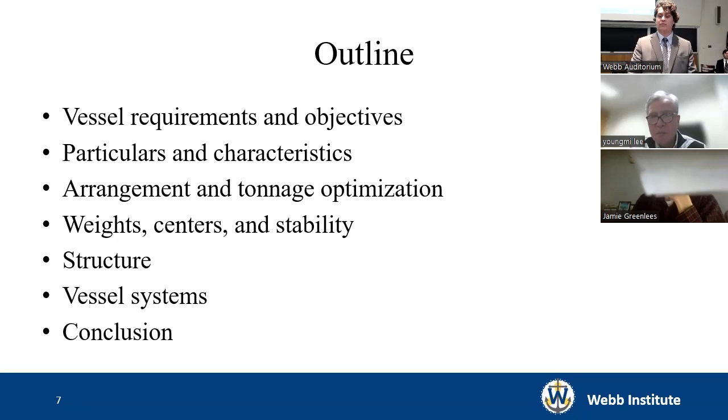In this presentation, we will describe vessel requirements and objectives, and introduce you to the design through its particulars and characteristics. We will then provide a detailed description through its arrangement and optimizations, and discuss the weights and centers as well as the stability. Finally, we will discuss the structures and vessel systems we used, and conclude with time for questions.

Now on to mission requirements. The image depicts the final goal of our high-speed CTV, the delivery of technicians and cargo to offshore wind farms.

To do this, our vessel had some functional requirements, such as being able to carry 30 technicians to wind farms located off the American East Coast, in sea states of up to Beaufort Sea State 4, which includes waves of significant height of 5 feet and winds up to 16 knots.

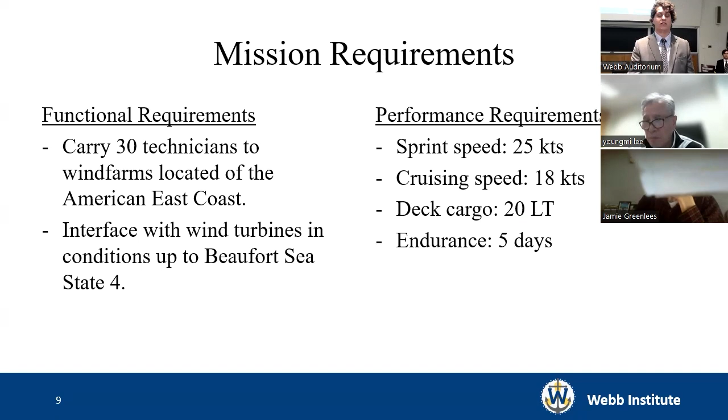In addition to our functional requirements, our vessel has a few performance requirements set by its owners, which include a sprint speed of 25 knots and the ability to carry up to 20 long tons of deck cargo and remain in the operating field for up to 5 days.

Beyond those requirements, our vessel must also carry a complement of 4 crew members in addition to 2 officers, and provide a workshop space for technicians to work on gear or small turbine parts prior to boarding the turbine.

Our vessel design is also subject to a variety of constraints, such as a 100 gross registered tonnage limit under the standard system, and a draft limit of 10 feet, as well as a 25% reduction in conventional fuel use to remain environmentally sustainable.

Our vessel is also subject to many regulatory bodies, such as Class NK, a Japanese class society with rules on small vessels and high-speed craft. We are also subject to US regulatory bodies, such as the Code of Federal Regulations, Title 46, Subchapter L, as well as international regulations, such as IMO's Intact Stability Code, created in 2008.

During the concept design's evolution, many systems were considered. The major systems focused on during this project included hull structure, the propulsion system, bow fendering, a battery and electrical system, and of course, passenger seating and comfort.

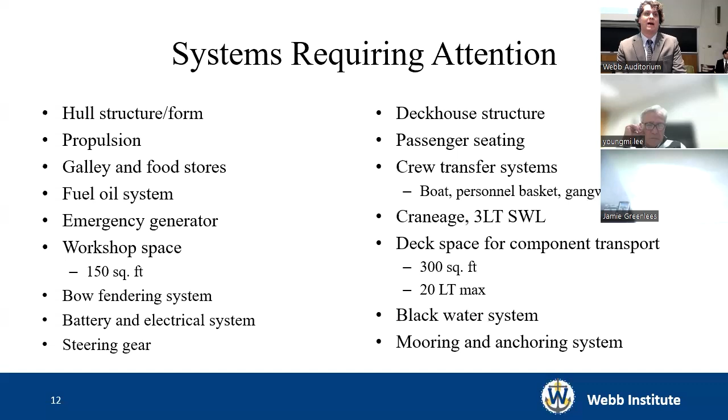Now I will introduce you to our vessel through its principal characteristics. The CTV we have designed is an aluminum catamaran, length of 91 feet and 8 inches, with an overall beam of 33 feet, with 11.5 feet per hull.

It draws a draft of 8 feet with a depth of 16.5 feet, and in its full load condition, displaces 153 long tons with a light ship weight of 94 long tons. It is also designed to operate at its required speeds and fulfills its cargo capacity requirement.

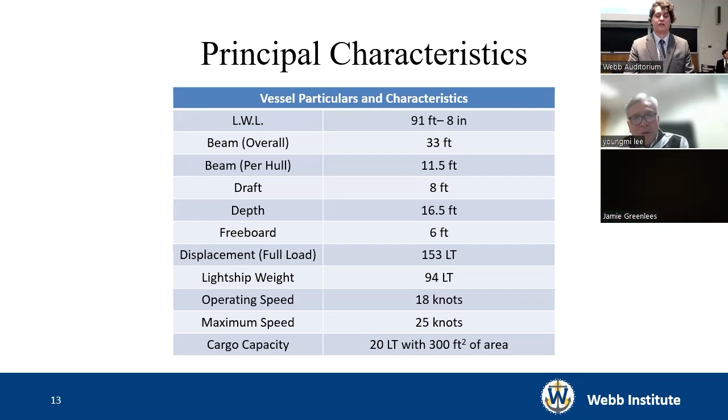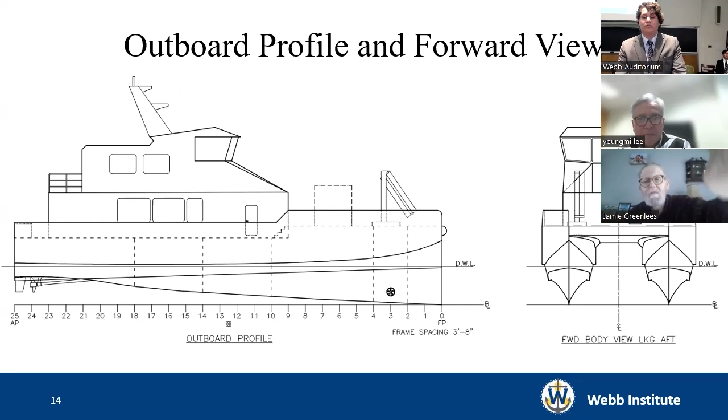This slide depicts our outboard profile and forward view of our vessel from our general arrangements. This view highlights unique features such as our deep axe bow and important clarifications such as the cargo container placed on the foredeck representing our max cargo load.

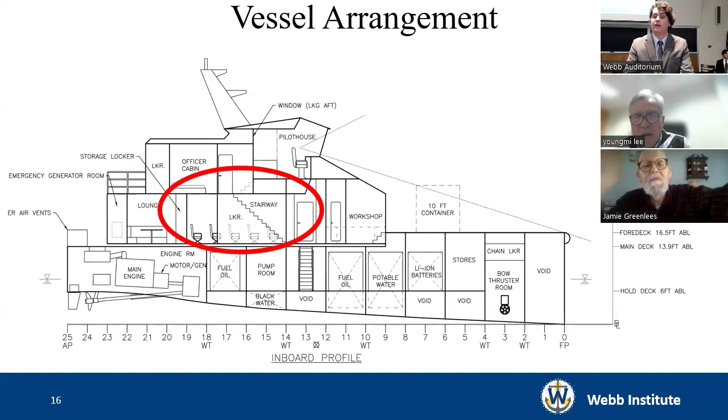This is our inboard profile. A large portion of our design hinged around the location of our technician or passenger seating. This section of the main deck has seating for all 30 technicians with 15 on either side of the vessel in rows of 3. This space is placed further aft than it is on many existing CTVs, which may improve technician ride comfort and reduce seasickness in rough weather.

Our crew and officers' cabins are located on the cabin deck aft of the pilot house. It was made sure to keep any long-term accommodations outside of the hull in order to maintain crew comfort, as during our visit, it was found that it's very cold in aluminum hulls and also very loud when underway.

Our bridge lies on the pilot house deck, which is slightly raised above the cabin deck, which maximizes visibility over the bow and sides in order to allow the pilot to have maximum awareness during any fendering operations in potentially rough seas, such as coming up to a turbine.

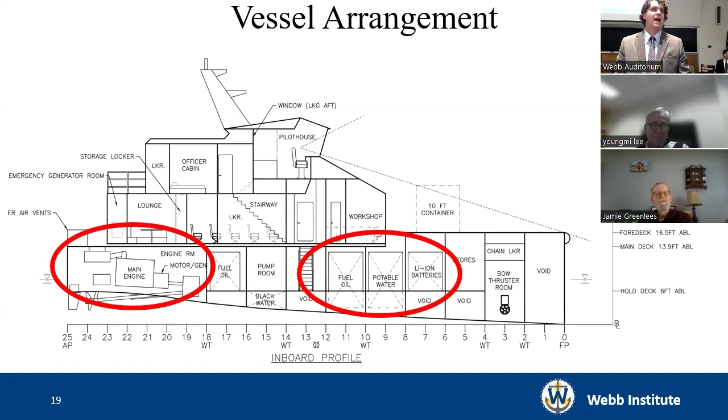Below decks, the inboard profile depicts our engine room, housing our main engines and combination motor generators in a V-drive configuration. In the forward end of our bow, large fuel and potable water tanks are stored to support our 5-day endurance, as our vessel does not have a freshwater generator.

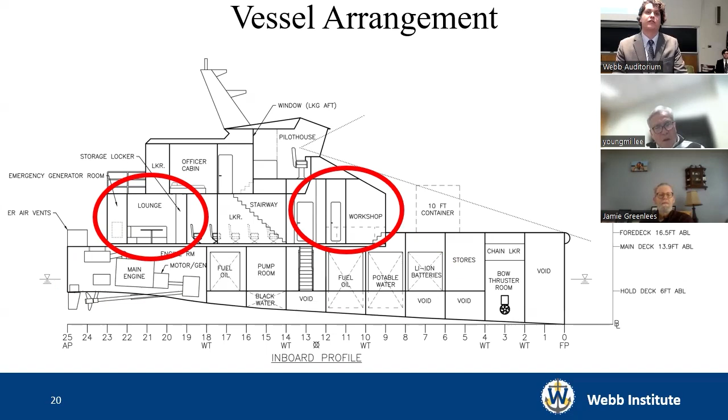In addition to that, a few concessions were made, such as a lounge, which the crew specifically requested and was very popular, and the addition of a technician workshop in the forward end of the main house to allow technicians to work on their own personal gear or parts.

I'd now like to invite Rayne up to discuss the main deck.

Thank you, David. This view shows a plan view of the main deck, where the technicians will spend most of their time and work will be done.

Important to note on this view is the technician seating, which is positioned close to the windows to provide a better view and reduce seasickness for the technicians.

Also important to note is the workshop and wet room spaces. The workshop is greater than 150 square feet to satisfy our design requirement, and also has direct access to the foredeck to make it easier to bring equipment inside and work on it without having to go around to the side. The wet room provides space for technicians to hang up their wet gear before going inside, so they don't have to bring wet gear inside.

There is also a head in the wet room so that those working outside can come in and use the head without trekking through the entire vessel.

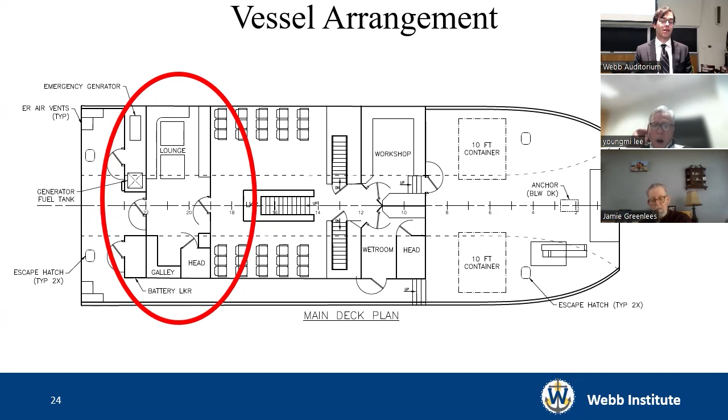Also, you can see on this view the lounge and galley area. These are particularly large because the crews that we visited requested larger lounge and galley areas to make living and working on the boat a little bit easier and a little bit nicer.

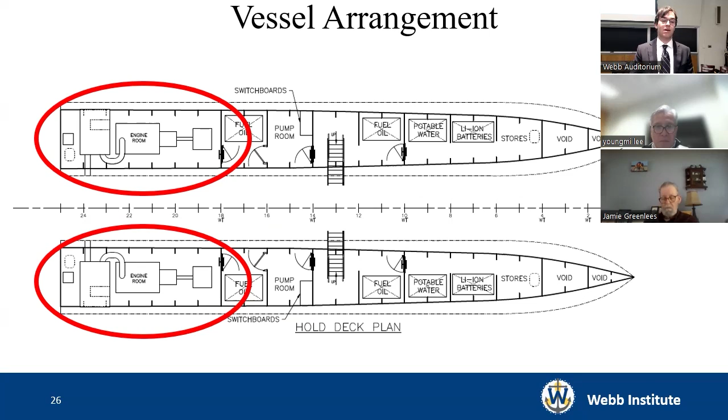This view shows the hold deck plan. Important to note on this is the large engine room, which will be discussed further in the presentation, and the governing aspect of the design of this space is the tonnage optimization.

There are deep frames located at several different points throughout the vessel that progress outward to reduce the tonnage counted for our vessel. In catamarans, it's particularly important that the part included in tonnage is towards the centerline of the vessel, because the area between the hulls, or the length between the hulls, is also considered.

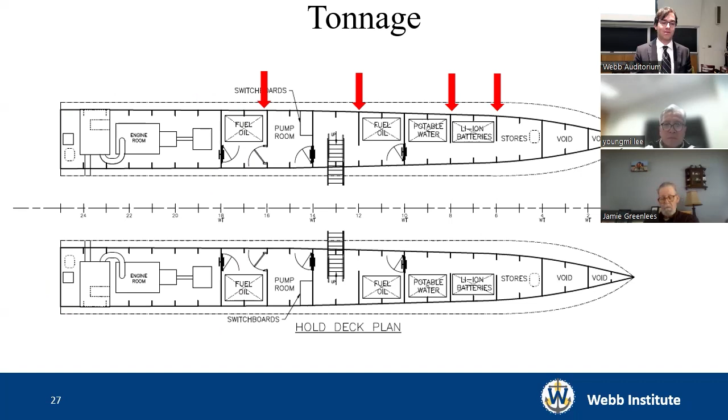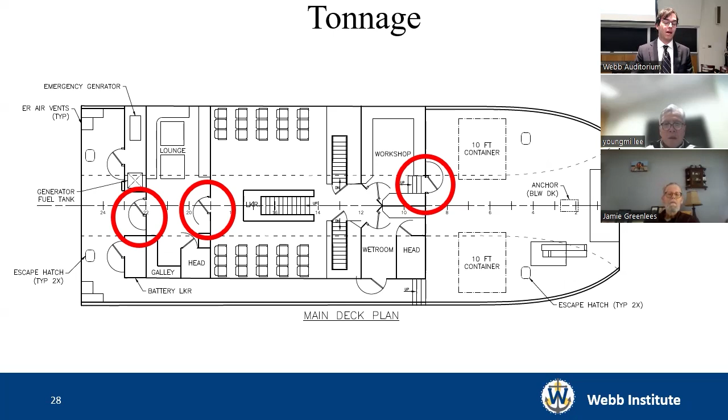There's also further tonnage optimization in the other areas of the vessel. We have tonnage openings with 4-foot wide progression throughout a lot of the main deck, which omits most of it.

After all the calculations were done, we still are at 128 gross registered tons. Our requirement is 100 tons. Partially, this was because later in the design phase we moved our crew cabins out of the hull and up onto the second deck, which increased the counted tonnage there, and that was a very late design stage decision. So that increased our tonnage, and we will have to, before the final design report, come up with more tonnage optimizations to exclude that space.

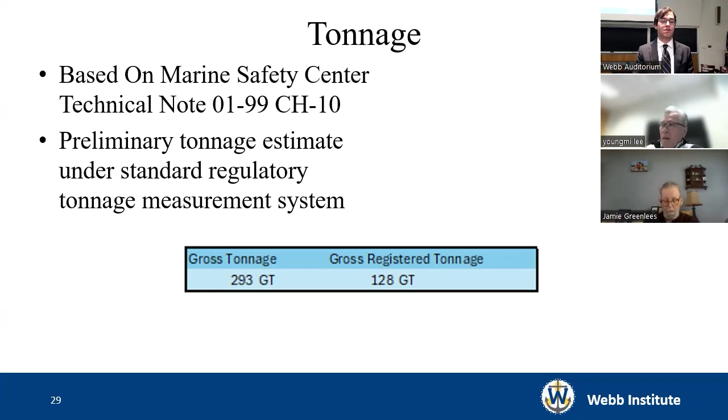That being said, we did reduce our tonnage counted from almost 300 tons using the deep frames and the exclusions that we did use.

This slide shows a profile view and half breadth plan of the lines plan. Note the deep axe bow, which helps for seakeeping.

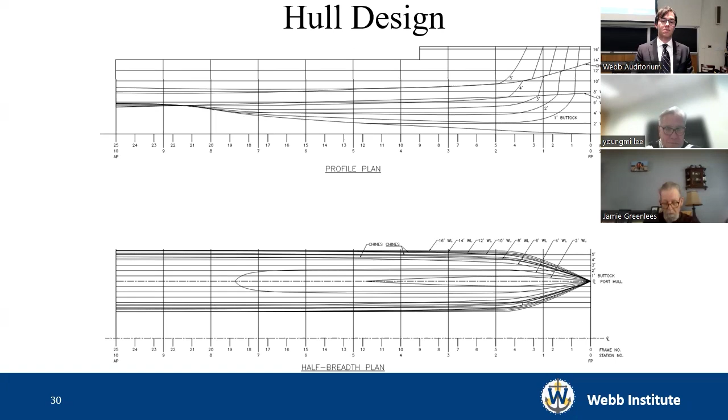Additionally, most of the hull is designed to be developable so that it can be constructed more easily. There are some areas around the stern which require a little bit more attention to get those to be developable surfaces, but most of it is developable at this point.

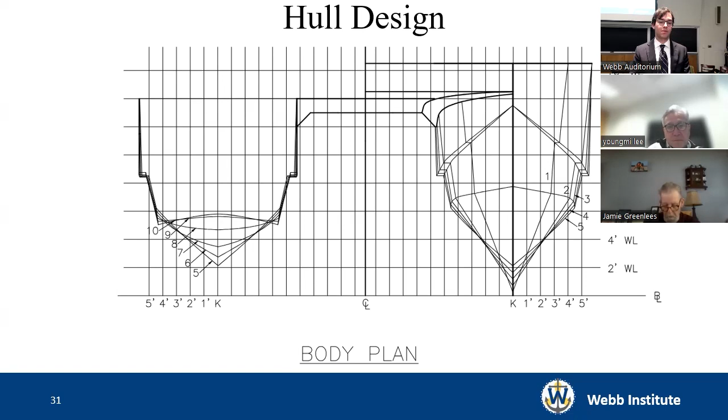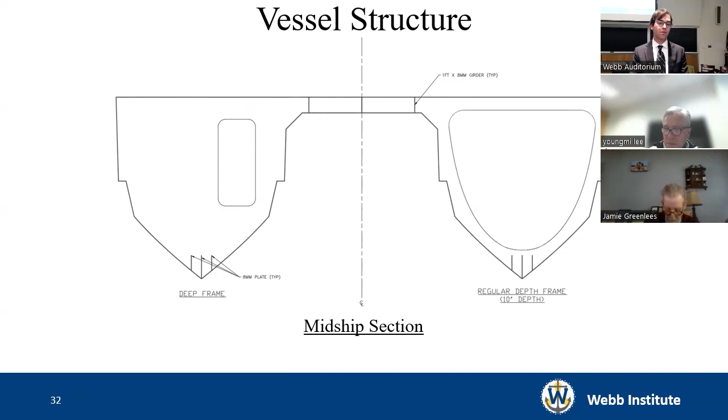This shows the midship section. We don't have any longitudinal stiffening here because we're a transversely framed vessel. The shell plating is 5/16 inch plate, which is thicker than typical CTVs this size because of the Class NK rules. Also, with this thick shell plating, we do pass the section modulus requirements with Class NK, which was the structural analysis used for this project.

The weights and centers estimations were done for 3 loading conditions: the lightship condition, full load departure, and full load arrival conditions. The hull form was designed such that the full load conditions have an even trim and sit at our design draft.

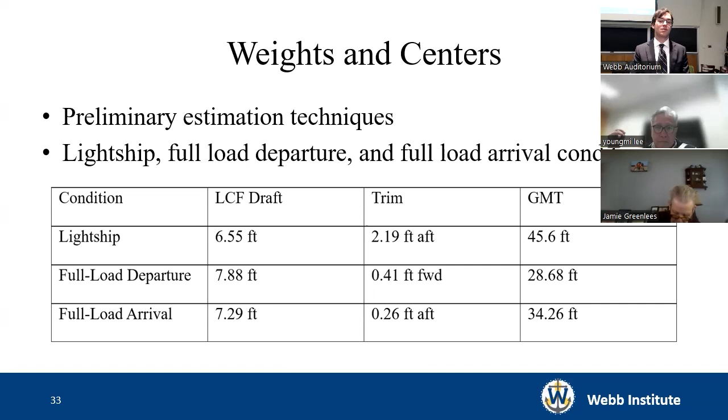The lightship condition has a slight aft trim. This is due to the removal of the large 20 long-ton cargo load on the foredeck in the lightship condition. That has a significant impact on a vessel that only weighs 92 long tons lightship, so it makes a big difference.

This is a visual representation of that shift in center of gravity from removing the forward cargo. You can see the full load center of gravity is farther forward than the lightship center of gravity. The center of buoyancy shown here is at the design draft. That will obviously move depending on where the center of gravity is until the vessel reaches equilibrium.

I would now like to invite Gunnar up to talk about the stability of the vessel.

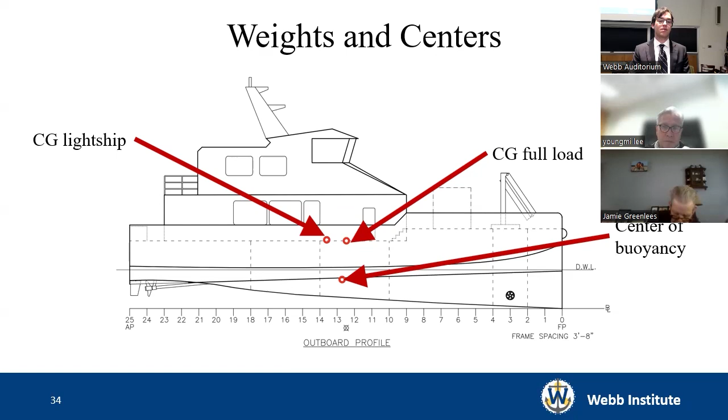Thank you, Rayne. Our vessel stability: as per the project requirements, the vessel is required to conform to the IMO's International Stability Code, or International Code on Intact Stability, adopted in 2008. The stability analysis was conducted using GHS, or General Hydrostatics.

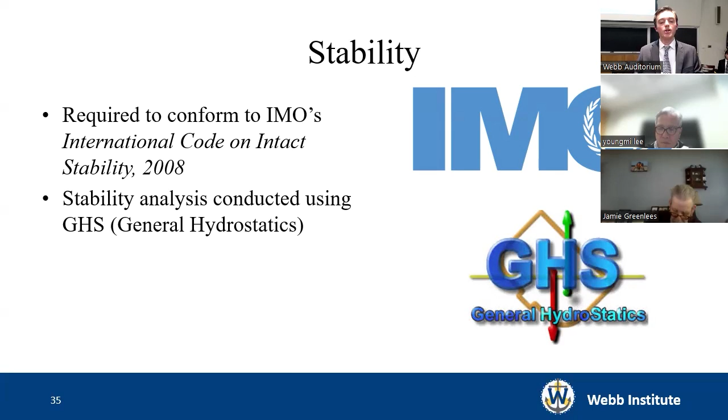This is the righting arm curve for the full load departure condition of our vessel. On this graph, please note the GM, which is circled, which is greater than 28 feet. Also note the angle of greatest righting arm, which is 22 degrees. These numbers are indicative of a vessel with very high initial stability, which is characteristic for catamarans.

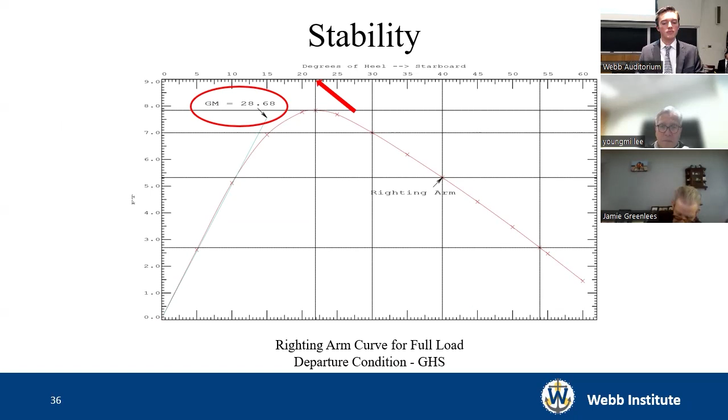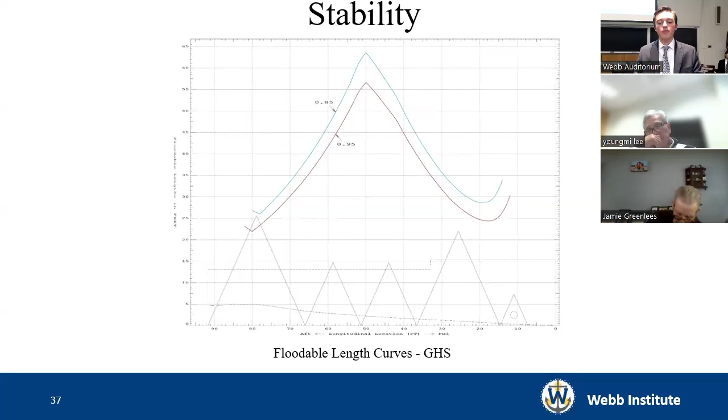These are the floodable length curves for the vessel. Notice that the engine room, the aftmost compartment, satisfies floodable length with a permeability of 0.85. The permeability of the forward compartment between frames 4 and 10 is currently set to 0.95, but due to the large tanks in the space, the actual permeability will be much lower. Still, if judging solely from floodable lengths, it would appear that flooding of the engine room is the worst case scenario.

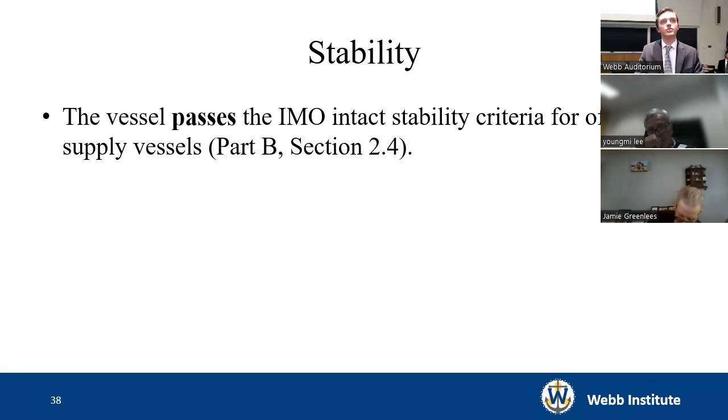In conclusion, the vessel passes the IMO intact stability criteria for offshore supply vessels, as described in Part B, Section 2.4 of the Intact Stability Code.

More simulation is necessary to determine if the vessel passes the damage stability criteria. Again, flooding of the engine room appears to be the worst case scenario. In another iteration, we may consider rearranging the machinery space and the surrounding bulkheads to improve survivability.

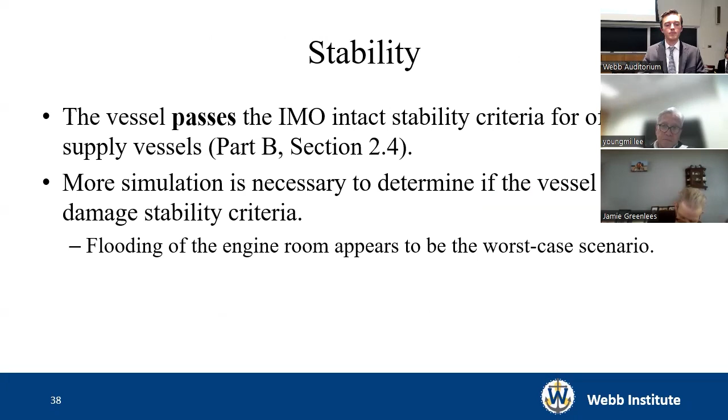I'll now discuss our vessel's propulsion system. We selected a diesel hybrid electric power plant because we found it to be a good compromise between capability, reducing underwater radiated noise, and meeting the 25% reduction in conventional fuel use.

We decided to utilize a V-drive because it allows for a more compact machinery arrangement, and we also found that to be typical of CTVs with shafted propellers. We also elected to use a controllable pitch propeller to enable best performance in each of our very different operating modes. This includes transit at high speed, electrically powered loitering at low speed, and delivering adequate bollard pull to push on the wind turbines at 0 speed.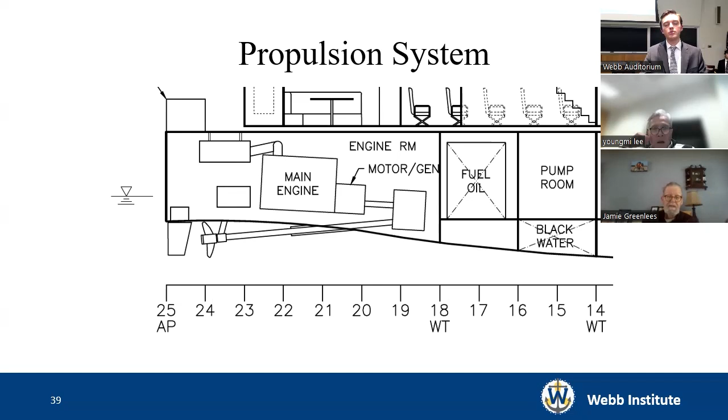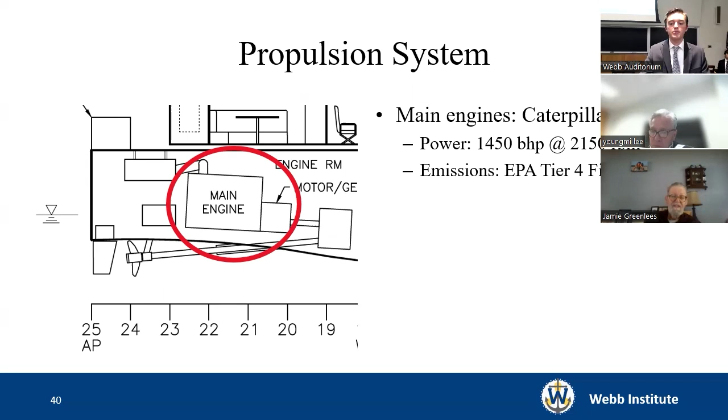For the vessel's main engines, we selected the Caterpillar C32. It produces 1,450 brake horsepower and can be made EPA Tier 4 compliant with urea aftertreatment.

The Cat C32 is a prolifically produced engine and is used by many different industries. It complies to the Buy America requirements of our customer. And we also found that Caterpillar engines were well liked by the American operators we spoke to because parts are plentiful and it's not difficult to find licensed technicians who can work on them.

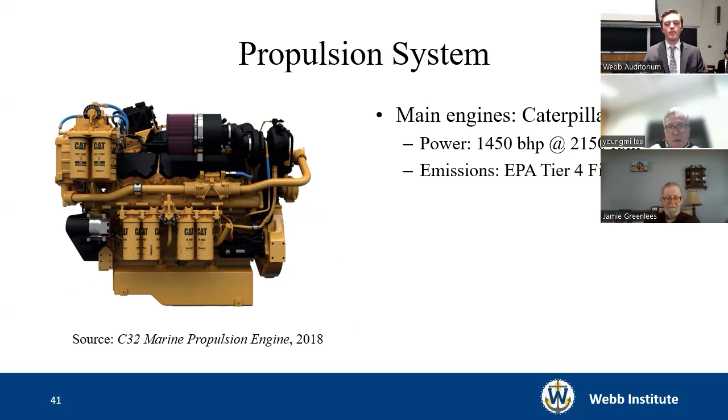For the motor generator of our hybrid drive system, we selected the Transfluid HM2000. In normal operation, the motor generator provides some of the propulsion power and all the electrical generation needs of the vessel. It is connected directly to the flywheel of the main engine and has its own bridge-operated clutch.

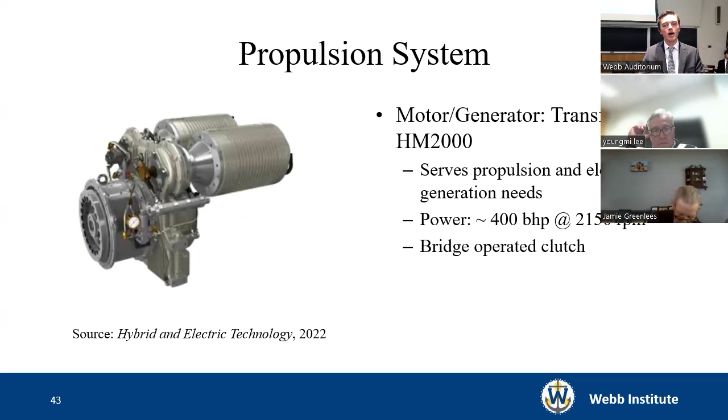The motor generator is capable of producing around 400 brake horsepower at the intended RPMs. However, it will rarely be used at full power due to the loitering operating profile. This is a marinized derivative of an established land vehicle hybrid system, so it's not unproven.

The V-drive we selected is the ZF8000V. It features an 8-degree V and is capable of handling the peak power output of both the main engines and the motor generator simultaneously. This would be an unusual operating mode, but it is considered nonetheless.

I'd now like to invite Burke Kanemasu up to the stage to discuss our bow fendering system and operating conditions. Thank you, Gunnar. All right, the active bow fendering system.

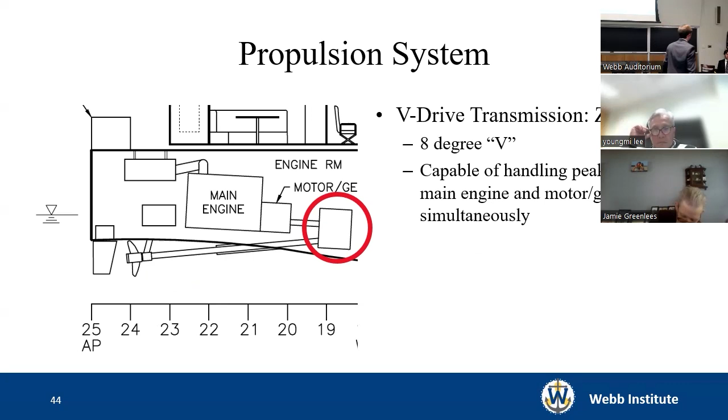The main purpose of this system is to keep the bow connected to the turbine during our crew transfer operations. This is done by way of notches that mate up with the vertical posts on the turbine, and also the hydraulic pistons shown in the figure serve to dampen the impact loads with the posts on approach. Additionally, the pistons allow for some wiggle room to keep the vessel connected firmly, even in larger waves.

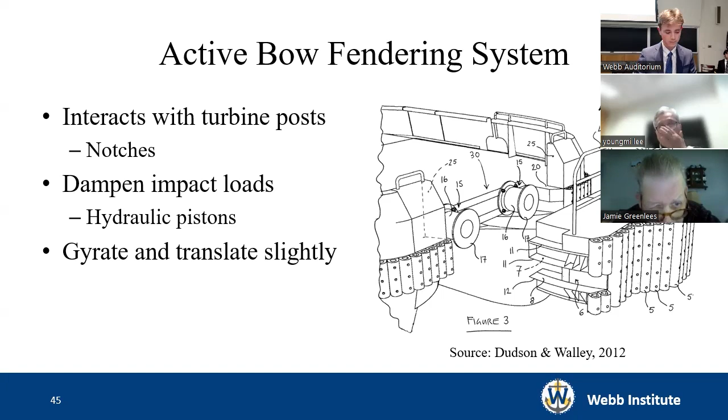So, going over our operating conditions. Our first primary operating condition is our loitering condition. This is when our vessel will be waiting at the turbine field for the technicians to finish their work. In this condition, we are fully electric and our engines are completely turned off. This is how we plan to meet our 25% reduction in conventional fuel use.

Our next primary operating condition is our cruising or transit condition. This is when we're going out to the turbine field and back. In this condition, our main engines are not only powering our propulsion, but also charging our batteries.

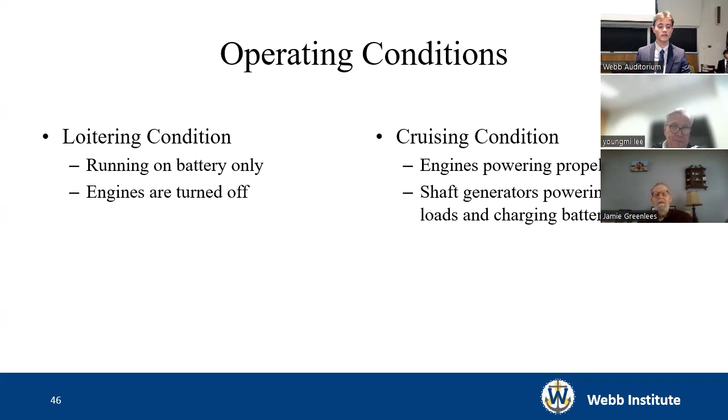So that brings us into our electrical system. Our electrical system can be split into 4 main categories. The first category, generation, includes our shaft generators, as we've discussed, and the emergency diesel generation. There's also consideration for future cold ironing directly from the wind turbines.

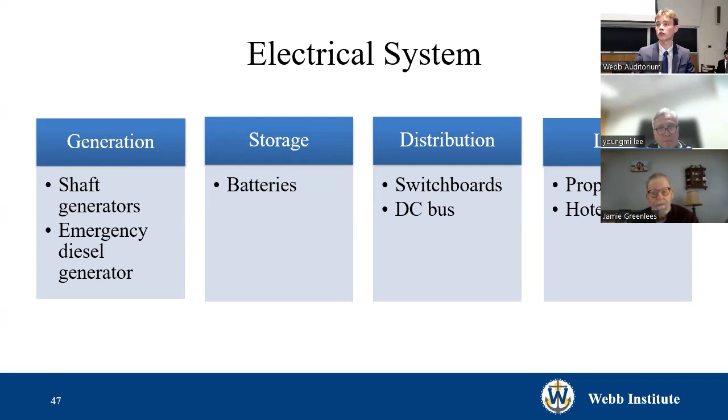The next category is storage. This includes battery rooms in each of the 2 hulls. Also, we have distribution, where we have switchboards in each of the pump rooms, and also a main DC bus. The specifics of our unique distribution system will be covered in the following slides. Finally, we have our loads. This includes our propulsion loads in our loitering condition, and also our hotel loads in all of our conditions.

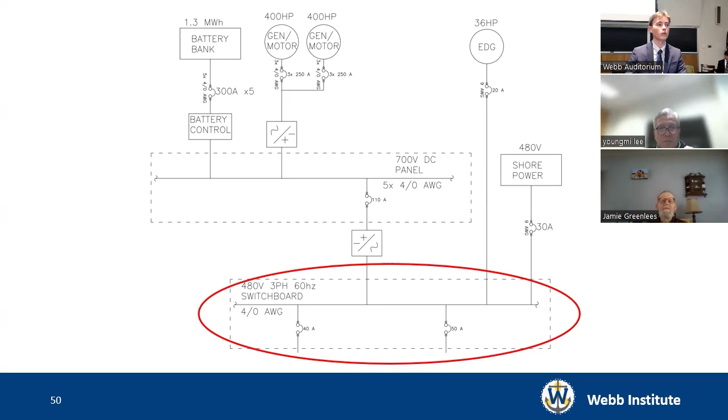Speaking of this 480-volt AC switchboard, this is fed by that DC bus, or it can also be fed by the emergency diesel generator in an emergency condition. When we are in port, it can be fed by shore power, or as we mentioned before, by the actual wind turbine during our mission condition. This will supply a 120-volt panel and a 240-volt panel.

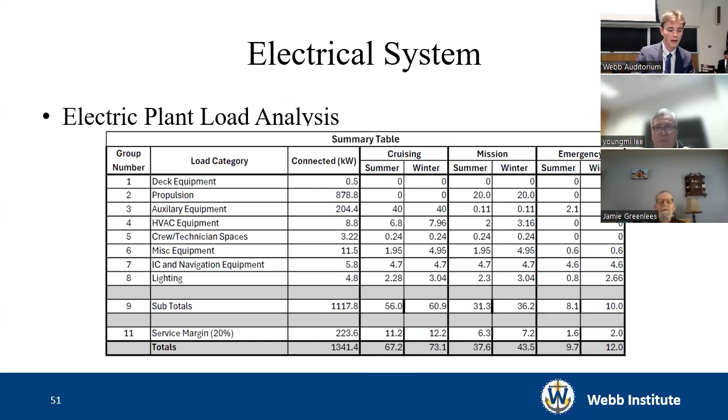Our electrical plant load analysis shows our cruising condition, our mission condition, and our emergency condition. It also splits each of those conditions into a summer and winter category. As you can see, the cruising condition contains the highest load, and specifically the winter cruising condition due to its slightly higher lighting, HVAC, and miscellaneous equipment loads.

In conclusion, our vessel satisfies the owner's requirements using 25% less fuel than other similar vessels. And that being said, it's still a very preliminary design. So a lot of things, as we mentioned, will be fixed in the next lap around the design spiral.